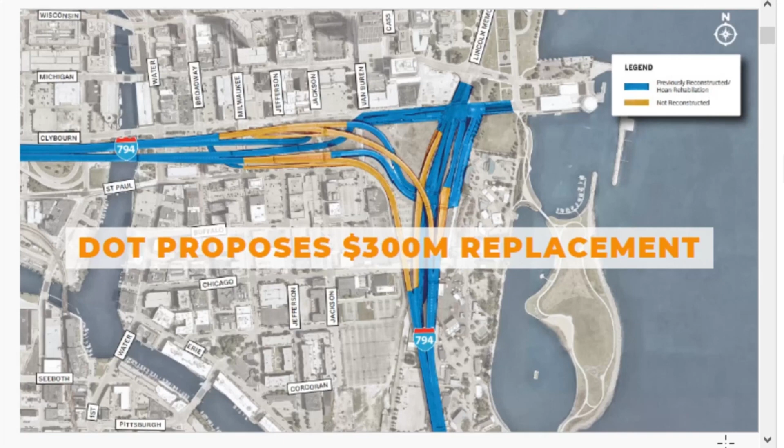So what prompted us to start thinking about this is about a year ago now, the Department of Transportation came out and said that they need to replace this stretch of freeway stretching from the Hoan Bridge to roughly the public market with something. They have to replace it, and they proposed that it would cost about $300 million to replace that. So we asked, is this the best way we can use this land?

And it's been asked before. This discussion has happened over the course of the last 50 years, but every time it comes up again where the DOT says, hey, we need to replace something in this stretch, it's brought up. This time is a little bit different because we have a lot of forward thinkers, a lot of people discussing this issue online and in their offices and places of work.

The mayor also has a big ambition to grow the city, and what better way to grow it from within the best parts of it, I would say.

There is 32 acres of publicly owned land under this stretch of freeway that stretches from the Hoan Bridge to the Marquette interchange. So we did a quick study initially to look at what the value of this land might be. This is probably the most valuable land in the state. We estimated that it might be worth $1.5 billion in potential development, which also includes public space, but would contribute to the tax base in a substantial way.

Initially, we were looking at the traffic and seeing that a lot of people use this stretch of freeway to get to downtown, and about a third of the traffic on the freeway actually uses it to pass through downtown. So it's primarily a commuter kind of stretch to get people delivered to their destination.

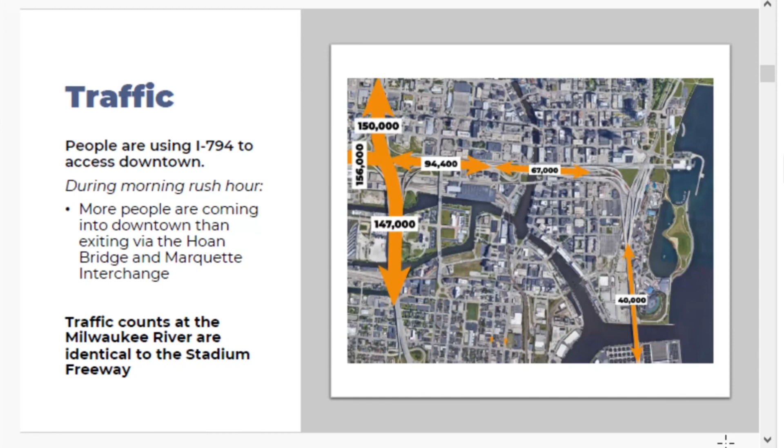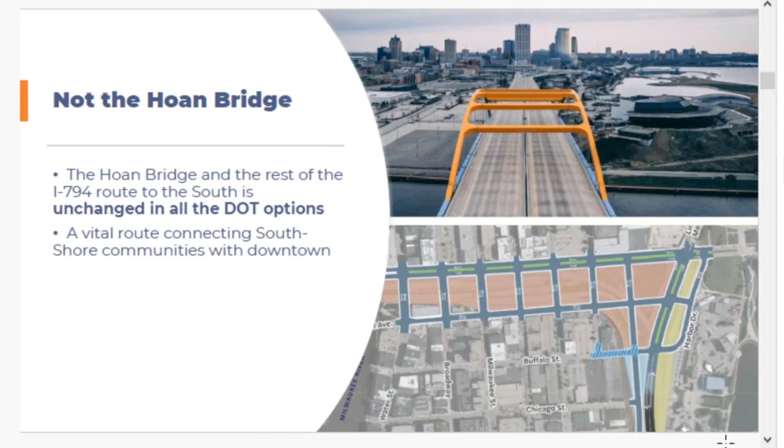To clarify, this is not talking about the Hoan Bridge. This is a vital connection to the South Shore communities and would remain in any of the DOT's proposed options that you may have seen a few weeks ago. We are talking about the stretch between downtown and the Third Ward.

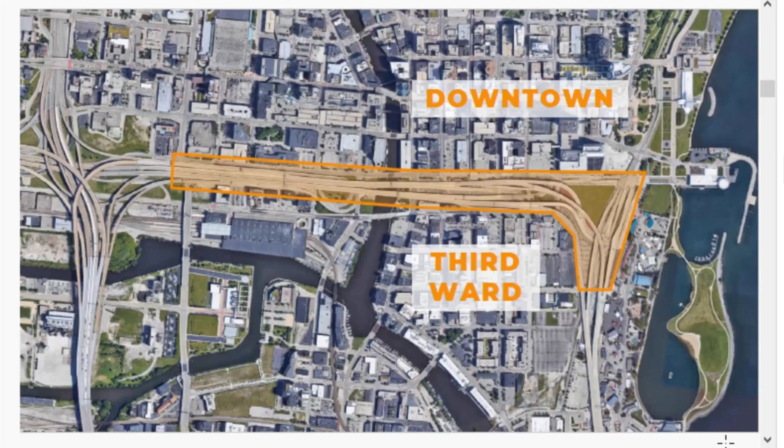It's roughly nine-tenths of a mile and currently acts as a barrier between two of the best neighborhoods. They have a lot going for them. The Third Ward is probably the most walkable area of our city, and downtown has a lot of prosperity happening there. So we want to see how this could better be utilized and connected with a street grid that would connect these two neighborhoods that have so much going for them, and actually provide more access.

If you're on a city street, you are actually going to your destination in a more efficient manner than being dropped off smack in the middle of the city and then having to make your way a different way to get to your destination. So this, we think, actually provides more access and multimodal access.

And we're talking about this infrastructure. This is 50-year infrastructure, so we've got to make the right decision for Milwaukee. This was built in an era where we had parking lots bordering Lake Michigan, and people commuted to the city. Today we're talking about 30-plus story residential towers going up in this area. People want to live here, work here, play here. And this is kind of the barrier that we're talking about.

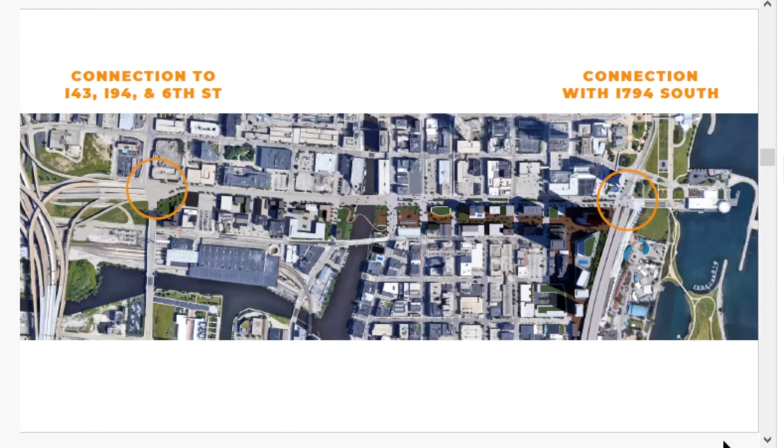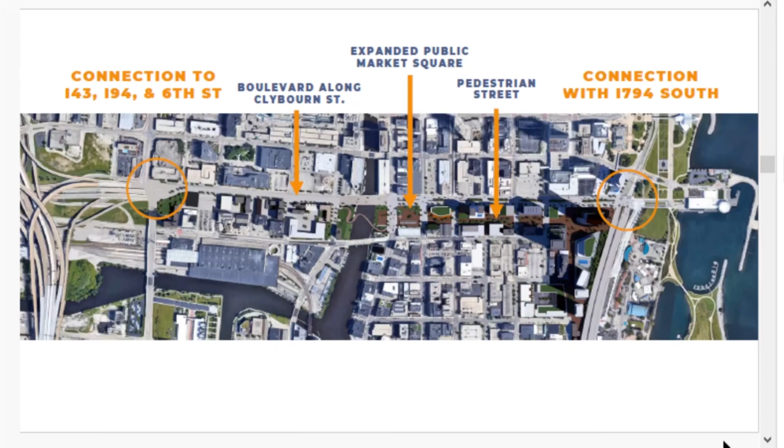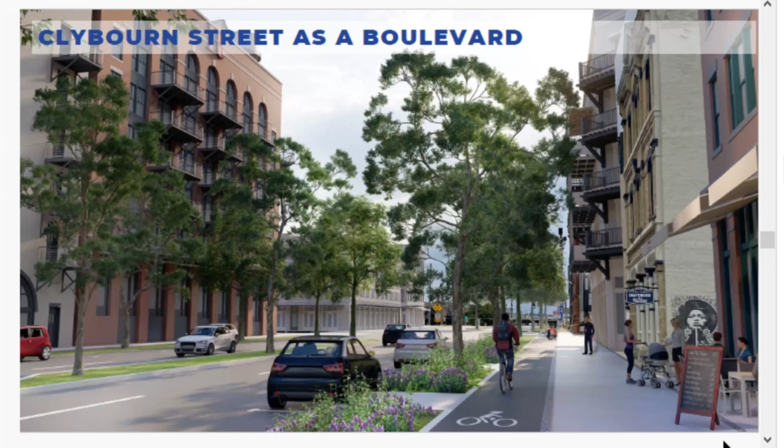Initially, what got us to this is that this was being talked about a lot online, and the momentum of that is changing with younger people wanting to see the city grow, living downtown, and wanting to stay downtown for a long time. These renderings just further catalyzed that conversation online and got people talking, but also got a lot of news publicity.

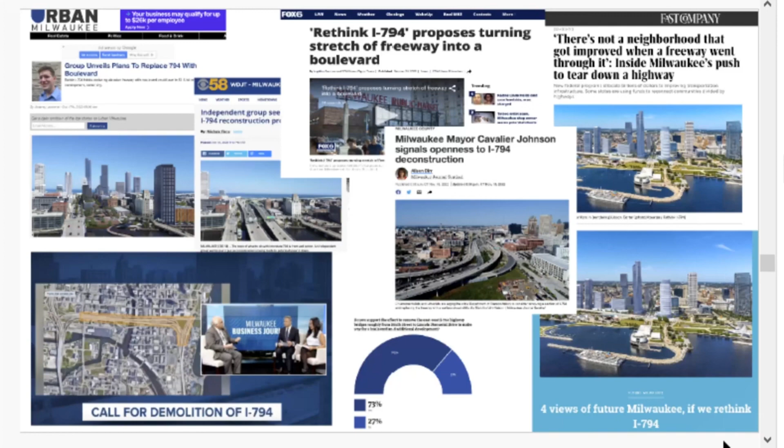I'm sure you've probably seen this, but it's even been talked about nationally. We're bringing this debate up 20 years after we removed a freeway in Milwaukee, and it was selected for the Congress for New Urbanism's Freeways Without Futures. They select 10 examples throughout the nation every year, and that's important because a lot of these actually happen over time, so it's an important step.

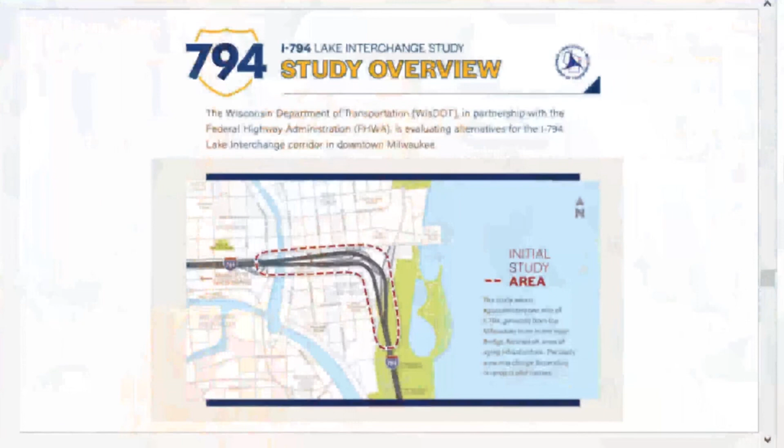And then, the Downtown 2040 plan—like Alex said, we pushed them along with the public to include it in the downtown plan, and the city did include their aspiration to see this removed or substantially bettered. That takes us to today, and I'll wrap up by discussing the study you may have seen a few weeks ago from the Department of Transportation.

Initially they were just looking at this stretch to the east of the Milwaukee River, but we wanted to push them towards looking at a different option and look at this more holistically about how the city is going to be for the next 50 years. So they came out with 8 options, and as of today they're narrowing it down because they had their first public meetings.

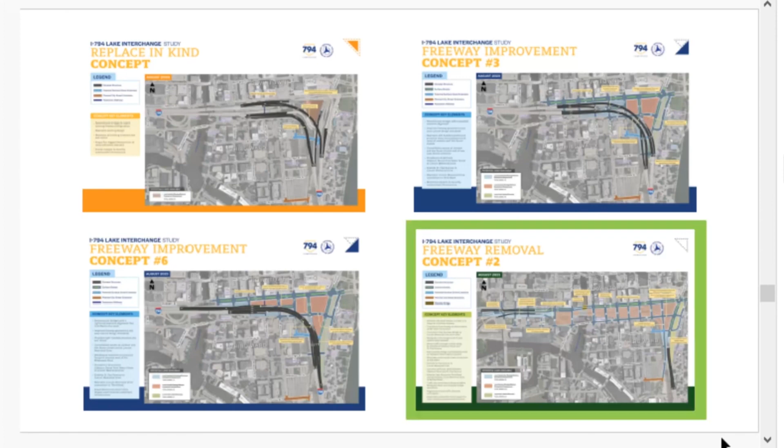I'm going to elaborate more on the concept of the removal option. This was their removal option, which is actually better than we envisioned they would provide. It really connects the downtown and the Third Ward with that street grid and disperses traffic throughout that grid.

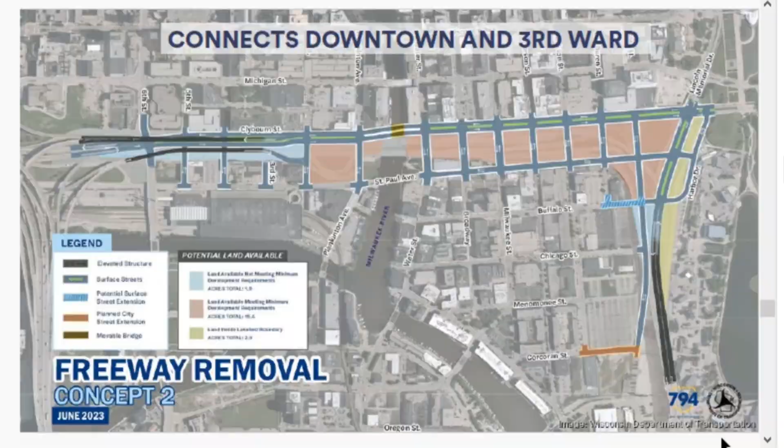Compared with what is a very walkable street in Chicago, Michigan Avenue, which carries 40,000 cars a day, this can be done with a very pedestrian-focused design—wide sidewalks, a landscaped median, parking spaces, and bike lanes.

A lot of people are asking what would be the effect on my commute. We tested it at rush hour many times, and we averaged about 3.5 minutes more than what is your stretch through this area today. From Lincoln Memorial Drive to the interstate past 6th Street is currently a 2-minute drive on the freeway, but about 5.5 minutes if you take city streets.

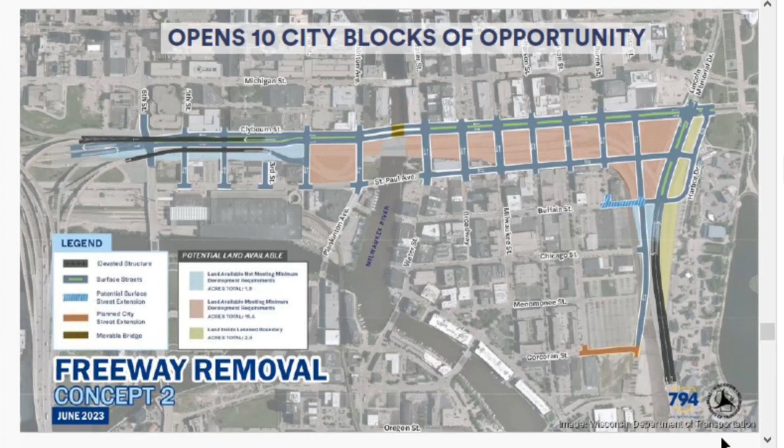But the trade-off, we think, is a lot of opportunity. There are 10 city blocks that the DOT is estimating could be opened up by doing this, and like we said, that could be worth upwards of $1.5 billion of development and public space to best be utilized for all Milwaukeeans.

To elaborate a little more on how this disperses traffic, it actually has lots of connections to the street grid, and that's important when we're looking at traffic patterns and how to disperse people to where they want to get to. We think this would actually deliver people to where they're going in a more efficient manner.

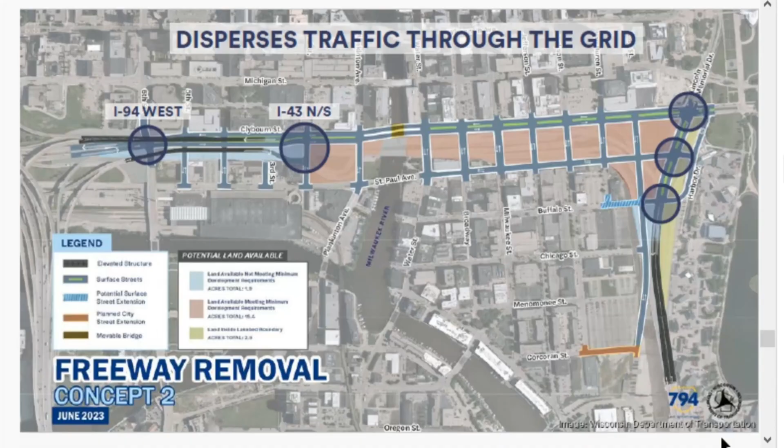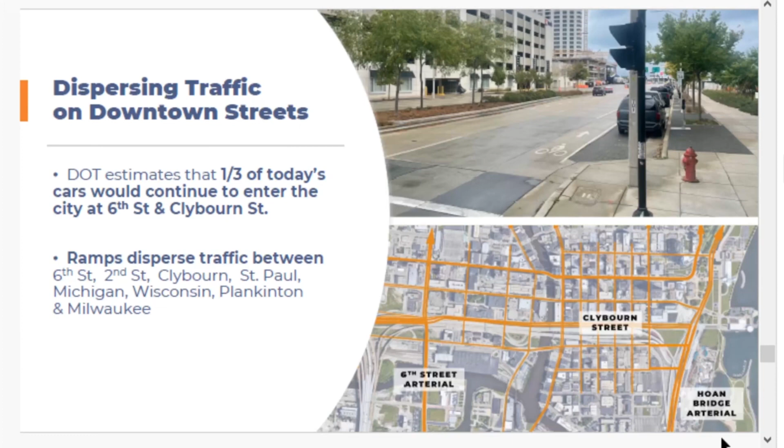The DOT is estimating that 1/3 of the cars that drive on this stretch today would continue to enter the city at this juncture, while 1/3 would go to the north exits and 1/3 would go to the south exits. That 1/3 of traffic entering on this corridor would be dispersed between many streets: 6th Street, Clybourn, St. Paul, Michigan, Wisconsin, Plankinton, and Milwaukee Street.

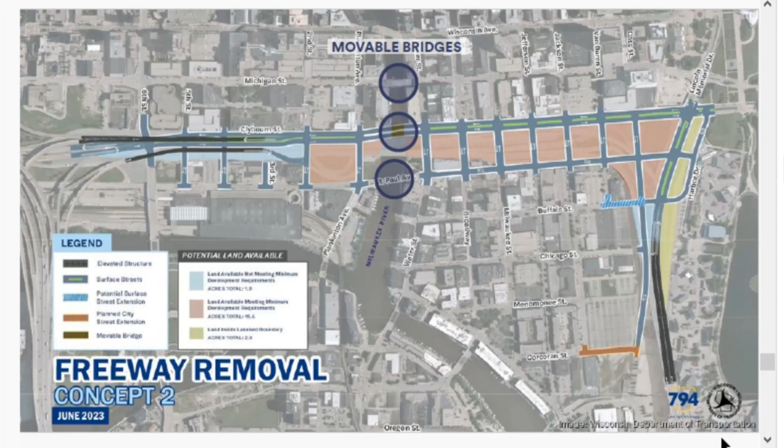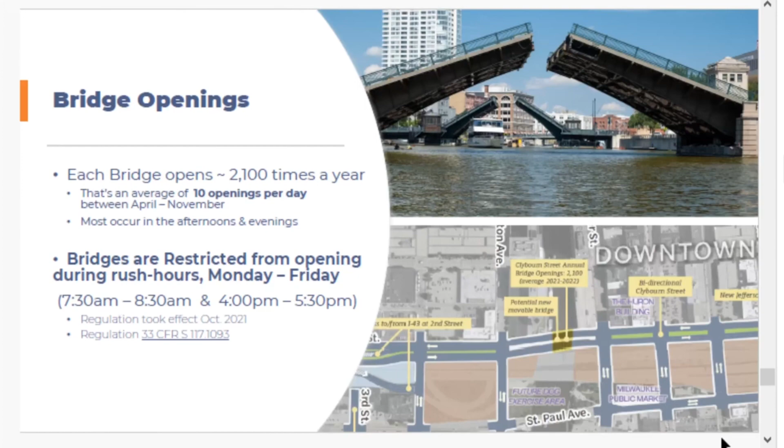When we talk about those city streets, that brings into play these movable bridges, and a lot of people ask how these would work with all of this traffic. The number of 2,100 openings per year is a lot—that amounts to about 10 openings per day, and most of those happen in the evening. But there is a restriction in place today, not well known, that prohibits the bridges from opening during rush hours, which was set in place in 2021.

One more thing to touch on is port traffic. A lot of people ask, well, this corridor is used by the port, and that delivers a lot of cargo and hard goods throughout the city. What would happen if that was at street level? Most likely, the answer is that they wouldn't continue to use the Hoan Bridge to go through downtown. They would use a more direct route with Becher Street and Bay Street, which is about a third the distance of going on the Hoan Bridge through downtown. So we want to advocate for designing that in a better way to suit that traffic, and the city is on board with helping mitigate that traffic impact.

Lastly, I want to touch on costs. These haven't been elaborated on much from the DOT's perspective, but those will probably be coming in the next few months. The Park East freeway is a similar size, and to scale, and that was removed for half the price of replacing it. $45 million then is $75 million today. Of course, 794 has a few more complications with the ramps that come into play there. But we expect it would actually be cheaper to replace it with city streets at ground level than to replace what they're proposing. Then, in 50 years, we don't have to come back and ask for more taxpayer dollars.

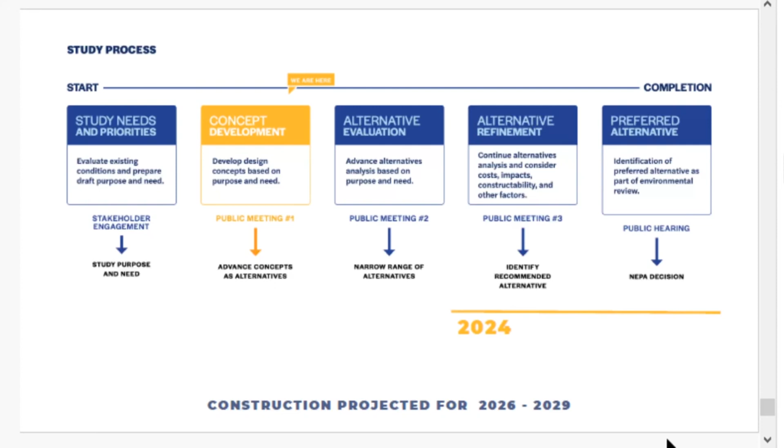I'll end with this: there are ways to get engaged with this process that's happening. There's feedback you can submit directly to the DOT's page. You can join our mailing list, and please discuss it with your colleagues and business partners, and consider writing in favor to your alderperson or county executive. So, thank you.

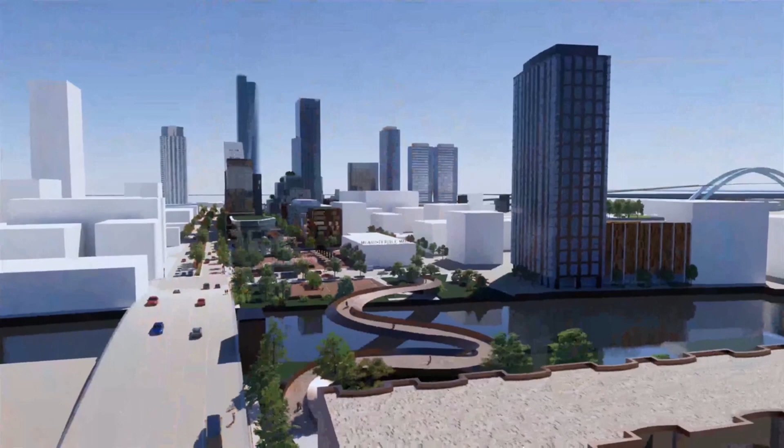I made this whole model, so I made a quick video of it to give you a bit more idea of what we're envisioning. This is just one idea of how that might look. This is the dog park remaining from what's being developed today. You're looking at the Milwaukee Public Market and the sport courts to the left.

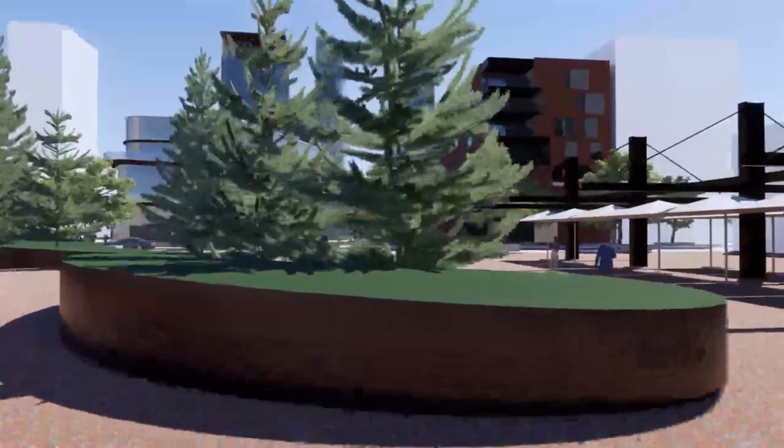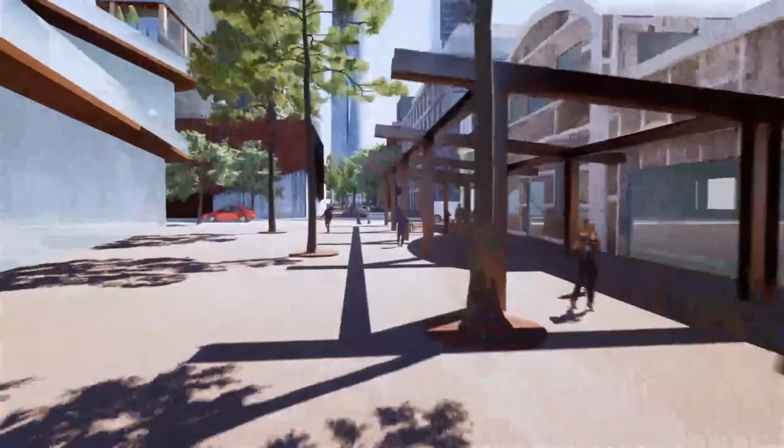This is Water Street you're passing, with an outdoor public market envisioned for that space. I had some fun music for this, but I didn't include it this round. This is a public corridor we envisioned for a very walkable neighborhood, with lots of trees and density of buildings. The city of Milwaukee is really maturing, and there's a lot of momentum happening in this area. This is the boulevard along Clybourn Street, with the Couture to the right.